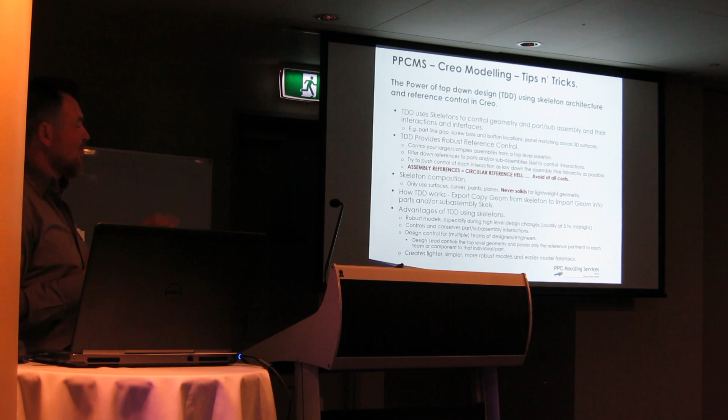So what a skeleton is - it's a fantastic way to control geometry of parts and sub-assemblies, and also their interactions and interfaces from a top level part file, or what we call a skeleton file. Using this we can control part line gaps, screw boss locations, button locations. If you've got a free-form surface and you're carving it up across multiple parts, it ensures you're getting that design intent and those surfaces coming through your parts.

The fantastic part of them is they're really robust if you build them right. You do need to look into your crystal ball and work out where you want to end, and work your way back and construct them right. But it controls those large and complex assemblies from a top-level skeleton.

Then you use what we call export copy geom, and import copy geom into a part to filter those references down to your parts and sub-assemblies. Try and keep it as lightweight at the top as you can, so you're trying to push any references that control two parts down as low as you can. So if you've got a part over here and a part over there, you don't have the same reference control at the top level - you push those down as far as you can.

The big thing I was always trained - I know the lead guys call it 'sloppy works', where you're just picking assembly references all over the place and then the whole thing explodes as you're trying to hit print to or export off to tooling or to prototyping. So I avoid assembly references at all costs, because that leads to circular reference hell, and that's really when the stress starts to kick in when you're trying to get files out for tooling or for prototyping.

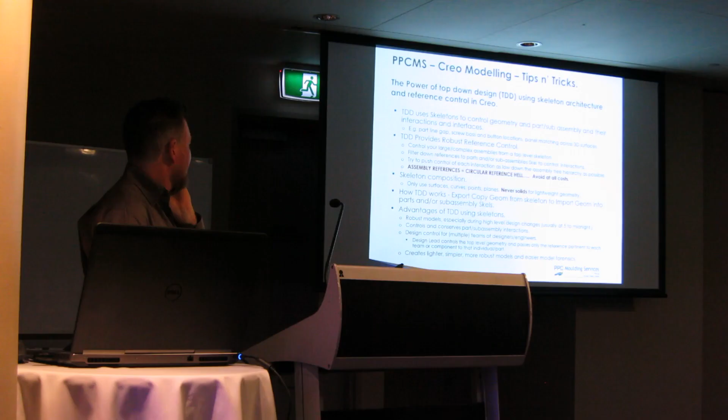For skeleton composition, the makeup, I use surfaces, curves, points and planes, but never solids, just to keep them really lightweight.

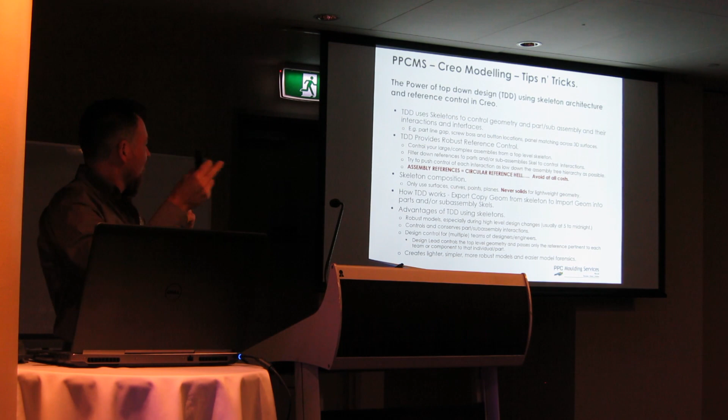How it works, as I explained before, you have your skeleton at the top, you export copy geometry in parcels or bundles of geometry down into export copy geom. That's fed into the parts - that's usually one of the top features in your model tree of the part - and import copy geom, and then that gives you the geometry that's just pertinent to that part.

The big advantages of top-down design using skeletons is it gives you really robust models if you build them right, especially during those high-level design changes.

So, five minutes to midnight at Nanosonics, a week before we wanted to send out for verification prototypes, we found out, because of certain reasons, that we had to increase the entire size of the unit by 20 mil. The unit's probably 60 long. Because we're able to do that, we generated it out, did all the changes, and a day and a half later we were ready to rock again. And that's got probably about 1,000 parts in it - lots of panels, frames, structures, a bit of wiring, looming, lots of tubing, all that sort of thing.

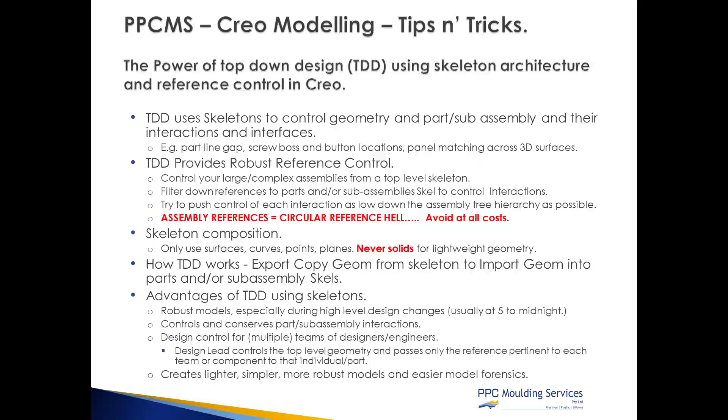So it really controls, when you do those changes, and conserves those part and sub-assembly interactions. You can make those changes flexing your whole assembly, but you've got confidence that if you put in a 0.5 part line gap, that's going to be conserved after your regeneration. So in terms of the amount of checking you've done after the change, you've got confidence that you don't have to go and check absolutely every little facet of your design or your assembly. And that just takes time when you've got that project manager going 'get it out, I've got to tick my box', all that sort of thing.

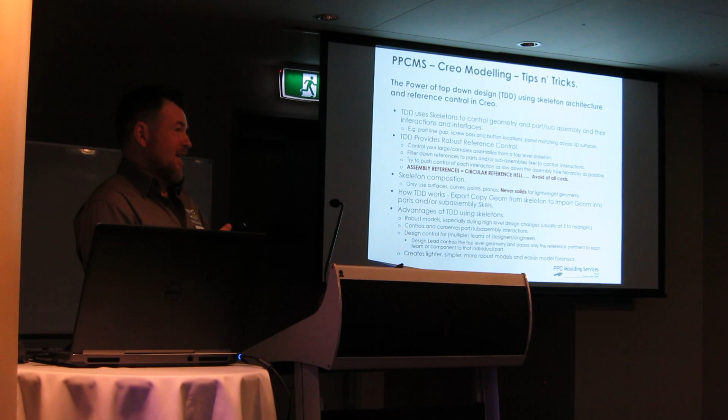Another really good thing, and I use it when I'm working on my own, but I've seen it work fantastically well - ResMed used this methodology from when I left there, we started in 2003 when I first started at ResMed, when we brought that in. It's fantastic for multiple designers and multiple teams working on different parts of the assembly, where you've got a head designer looking at the overall shape, and then he can parcel that out to a team leader doing that assembly, and pass that geometry out to this team leader. They can work within their envelopes, confident that when they come back together, it's going to be sort of seamless interaction between the parts.

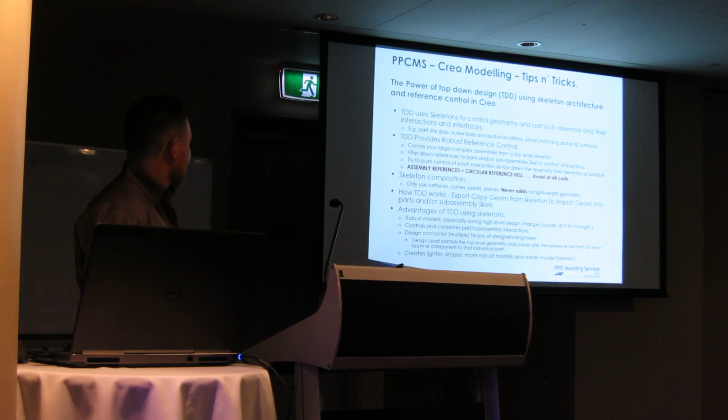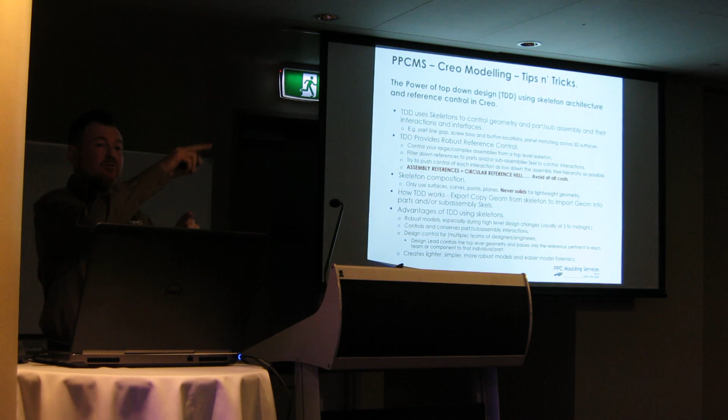As long as they stay within the confines of those envelopes, they're not going to have clashes or mismatch, and also the whole product looks uniform. You don't have this team with their style that doesn't match the style of another one. Another big advantage, and this is when things go wrong - it creates lighter, simpler, more robust models and easier model forensics. So really encourage you to get in and use your investigative tools to go back and work out where the references are, especially if you're inheriting designs.